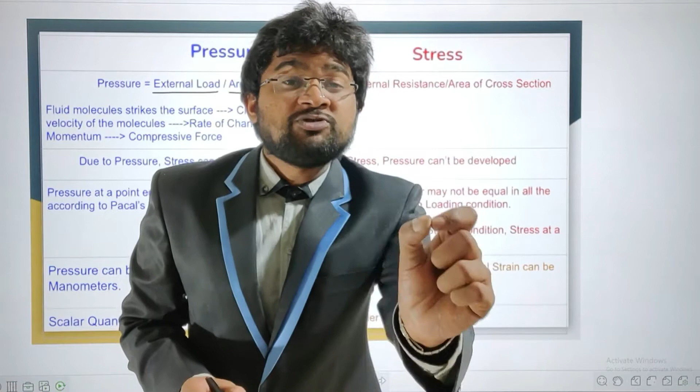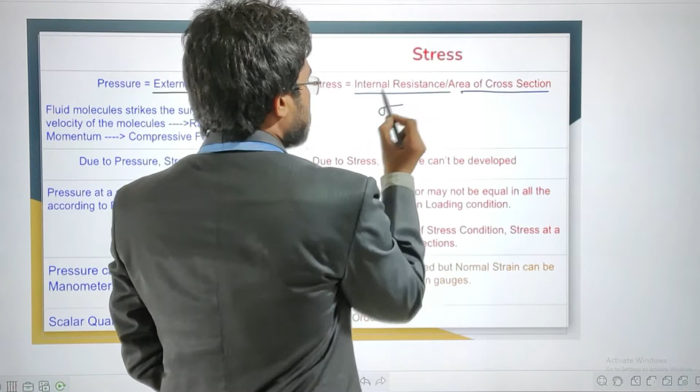Come to the definition of pressure. Pressure at a point is defined as the magnitude of external force acting per unit area of cross section. Now come to the definition of stress. Stress at a point is defined as the magnitude of internal resistance offered by the body per unit area of cross section. This is sigma, and pressure is P.

If this question is asked in the interview, almost 90% of people will give the same answer because everybody knows the definition of pressure and stress. But we need to give a different definition for pressure, starting from the molecular level.

Pressure is associated with molecules. When these molecules strike a surface, the velocity of the molecules changes. Due to this change in velocity, change in momentum comes into the picture. The rate of change in momentum is nothing but force. The magnitude of this force acting per unit area of cross section is called pressure. Pressure is always applied externally, and it is always compressive in nature.

I want to give a single statement answer to differentiate pressure and stress: if I pressure you, you will feel stress. Both definitions are covered in this single statement. The feeling should come from internally, while pressure is applied externally. For example, if your guide pressures you, you will feel stress. That is the single line statement for differentiating pressure and stress.

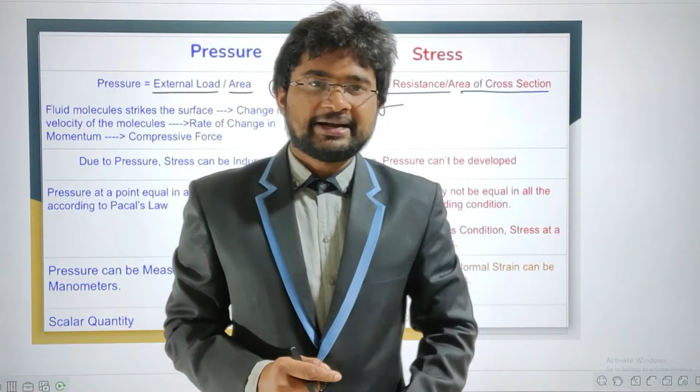Due to pressure, stress will be induced, but due to stress, pressure cannot be developed. This is a very important statement. Also, pressure at a point is always compressive in nature, but stress may be either tensile or compressive. Pressure is a scalar quantity, a zero order tensor.

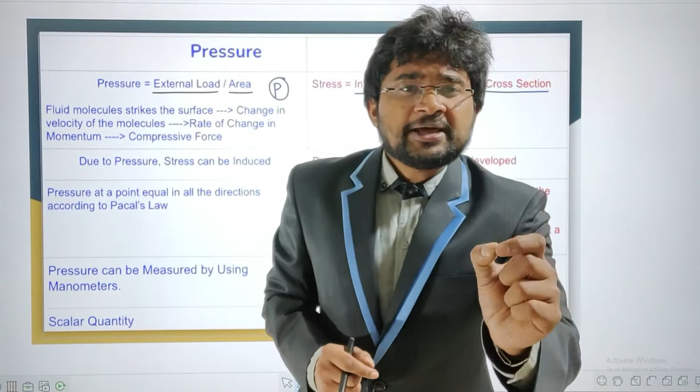Stress is a second order tensor. We know scalar is a zero order tensor, where only magnitude is sufficient. Going to a higher order, a vector requires both magnitude and direction to represent, so that is a first order tensor.

To represent stress, we need 9 components, so we move to a higher order, the second order tensor. We need to represent the stress tensor in terms of a 3x3 matrix for the triaxial state of stress condition.

Coming to other examples of second order tensors, those are moment of inertia, either mass moment of inertia or area moment of inertia. Both are second order tensors, and we need to represent moment of inertia in a 3x3 matrix.

Coming to rotation and reflection, both are orthogonal tensors, which can be called second order tensors. Take care that if the determinant of the orthogonal tensor is +1, you can call it a rotation matrix; if -1, a reflection matrix. Transformation is a combination of both rotation and translation. Translation is a first order tensor, that is a vector. Transformation is a second order tensor.

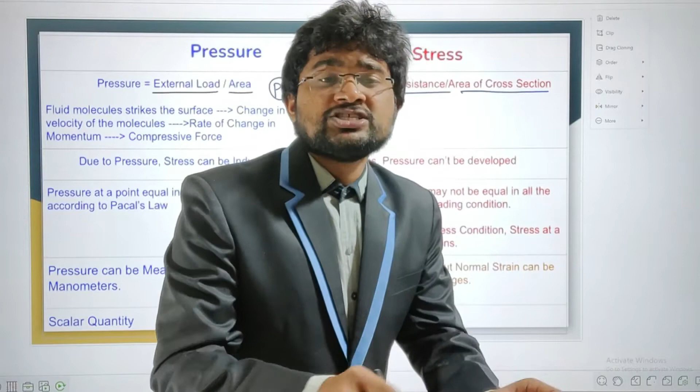According to Pascal's law, pressure at a point is equal in all directions. That means it is independent of direction. That's why we call pressure a scalar. But stress at a point is not equal in all directions. It depends on the loading condition. Pressure can be measured using a manometer, but there is no equipment available to measure stress.

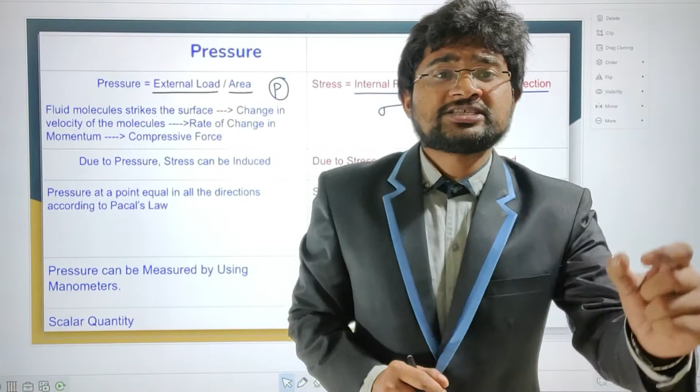Normal strain can be measured by strain gauges. Pressure is defined as the magnitude of external force acting per unit area of cross section. Stress is the internal resistance offered per unit area of cross section. Pressure is a scalar quantity; stress is a second order tensor. Pressure at a point is equal in all directions, but stress at a point is not equal in all directions, it depends on loading condition. But for hydrostatic state of stress condition, stress at a point is equal in all directions. Pressure can be measured, but stress can't be measured. Normal strain can be measured by strain gauges, and that is the input to derive all the expressions of stress you've already seen in strength of materials.

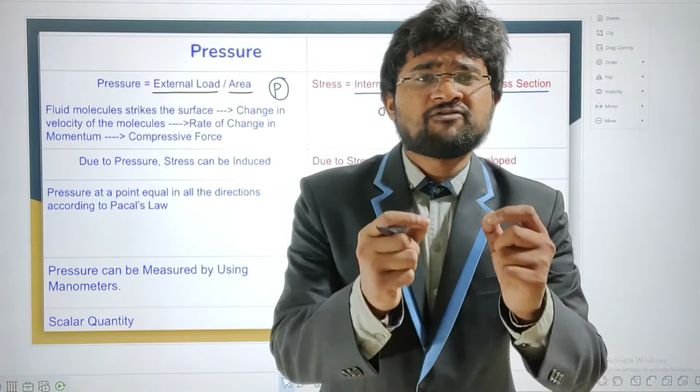This is all about some funda regarding pressure and stress. We know that stress is a second order tensor.

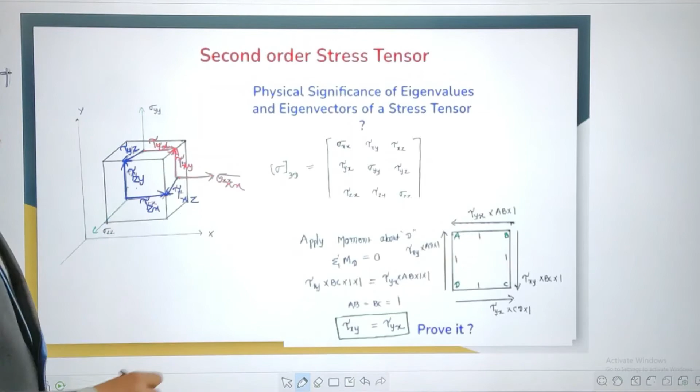This is the box representation of stress. Here sigma xx, x face and x direction. Here it is tau xy, x face and y direction. Here it is tau yx. Here it is y face and z direction. Tau z face and y direction. Z face and x direction, x face and z direction. This is the box representation of stress. Stress is a second order tensor.

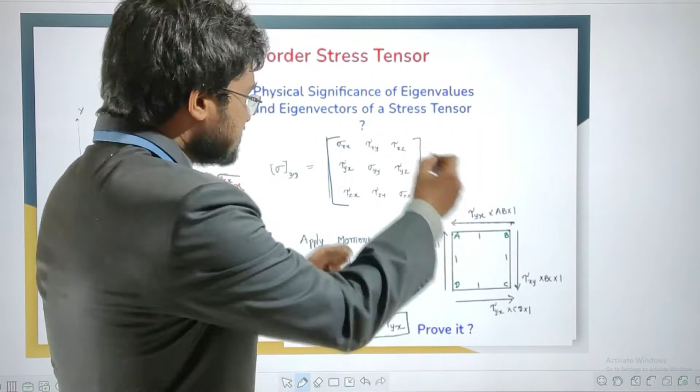Now the matrix representation of stress in 3D: sigma xx, tau xy, tau xz, tau yx, sigma yy, tau yz, tau zx, tau zy, sigma zz. This is the matrix representation of stress.

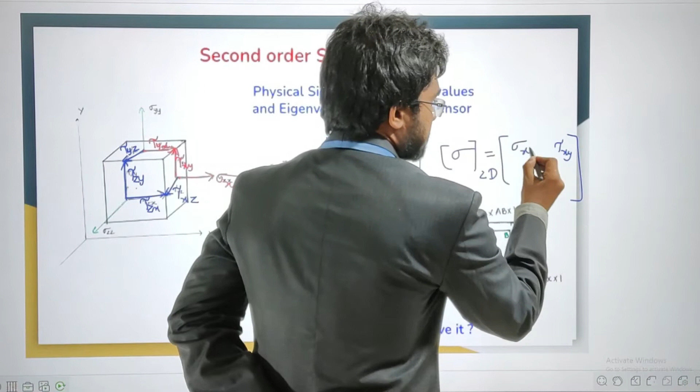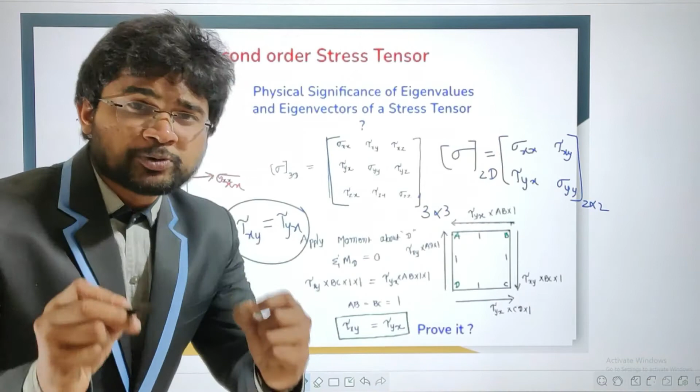Now if it is 2D: sigma xx, tau xy, tau yx, and sigma yy. This is for 2D. We need to prove tau xy is equivalent to tau yx.

State of stress diagram at a point for the pure torsion case. See here, this is... here it will be like this. Here it is x face in y direction, tau xy; this is y face and x direction, tau yx.

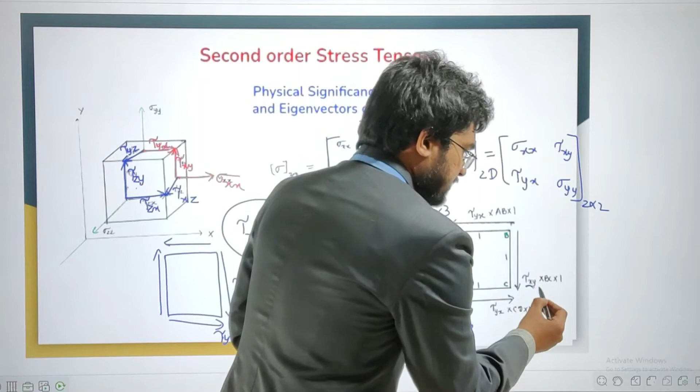I converted all the stresses into loads. Here tau xy into BC into 1. Stress into area is nothing but force. Tau xy into BC into 1. Tau yx into AB into 1. I converted all the stresses into loads.

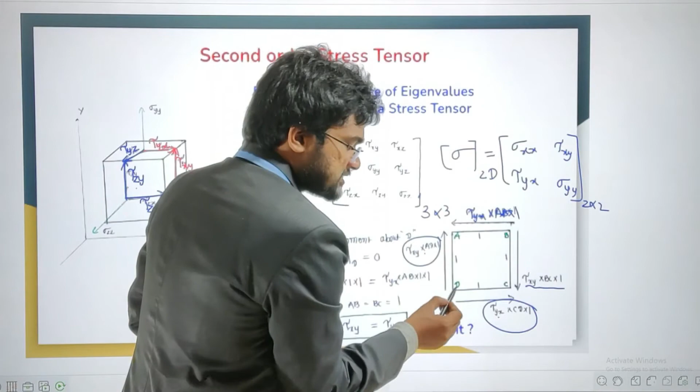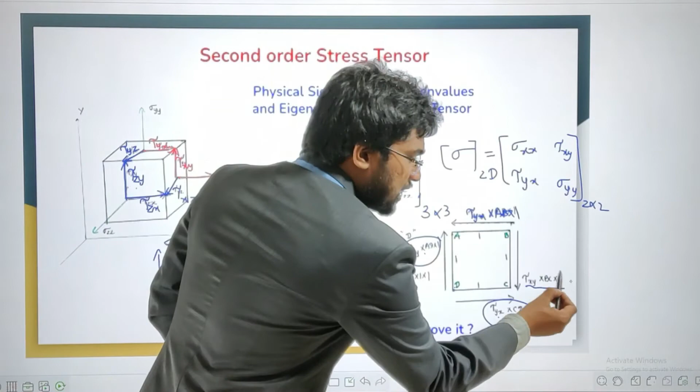Now apply moment about point D. Moment of these two forces about point D will become zero. Moment of tau yx into AB into 1 about this point will be anti-clockwise direction. Moment of this force about this point will be clockwise direction. Sum of the clockwise couples equals sum of the anti-clockwise couples. Take sigma M at D equal to zero for equilibrium condition.

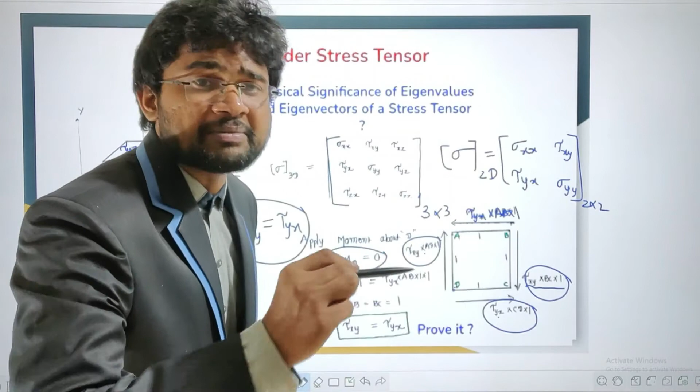Finally you get tau xy into BC into 1 into 1, and tau yx into AB into 1 into 1. Finally, you get a beautiful expression that tau xy is equivalent to tau yx.

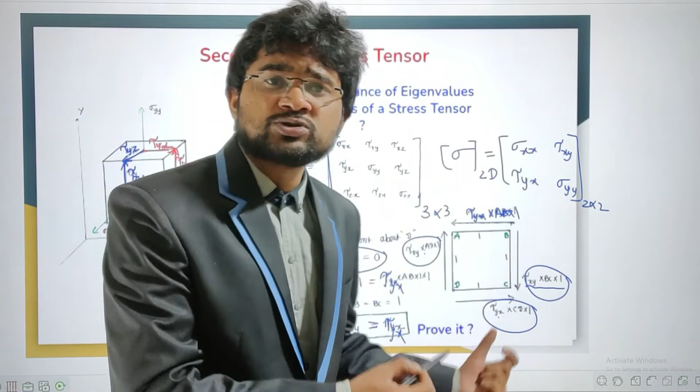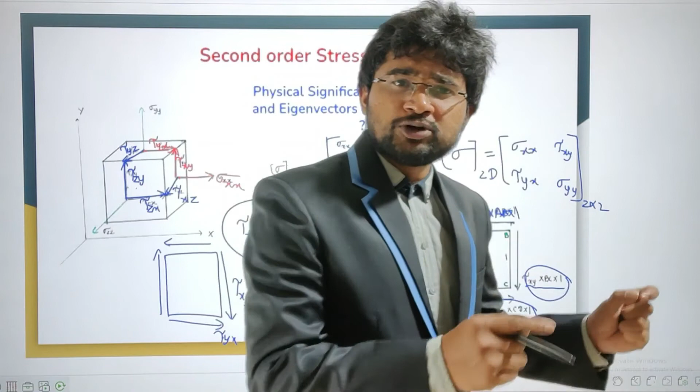I got this question from my friend. He faced this question in an IISc Bangalore interview for M.Tech. The interviewer checks your knowledge on whether the student is in a position to draw the box representation of stress and the matrix representation of stress.

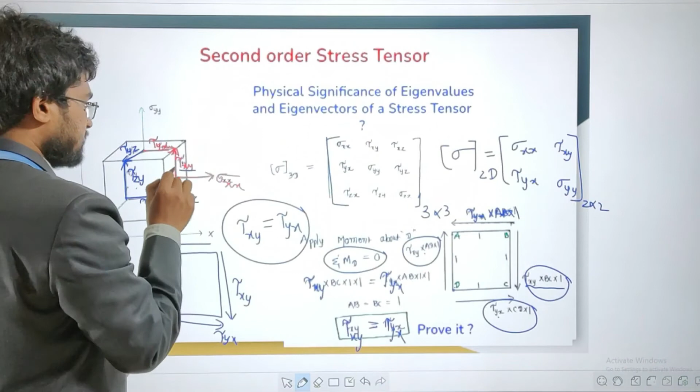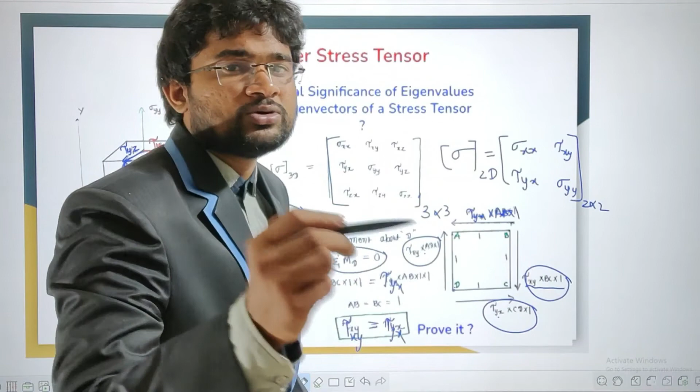What is the meaning of tau xy? Tau xy is shear stress on x face in y direction. And whether the student is in a position to derive tau xy equivalent to tau yx. So that is very, very important.

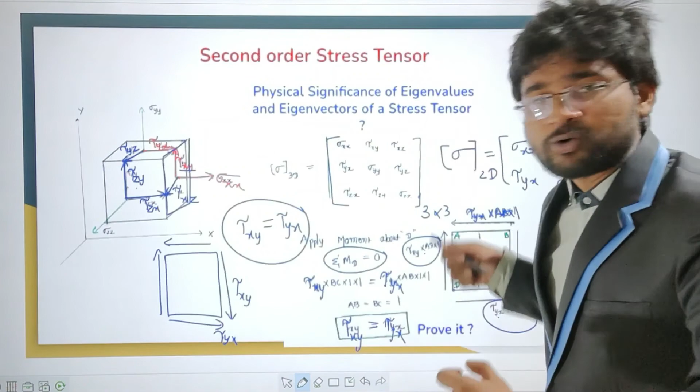Some good input for the students. Stress is a second order tensor. We have drawn the box representation of stress and the matrix representation of stress, and finally proved tau xy is equivalent to tau yx. This is all about some introduction regarding stress and pressure. Thank you.